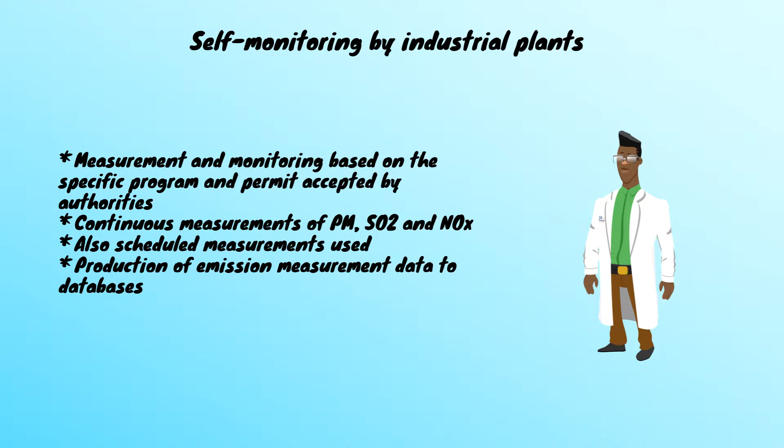The evaluation and control of emission reports takes place by regional environmental authorities. Eventually, additional information may be asked for, or even environmental inspectors may pay visits.

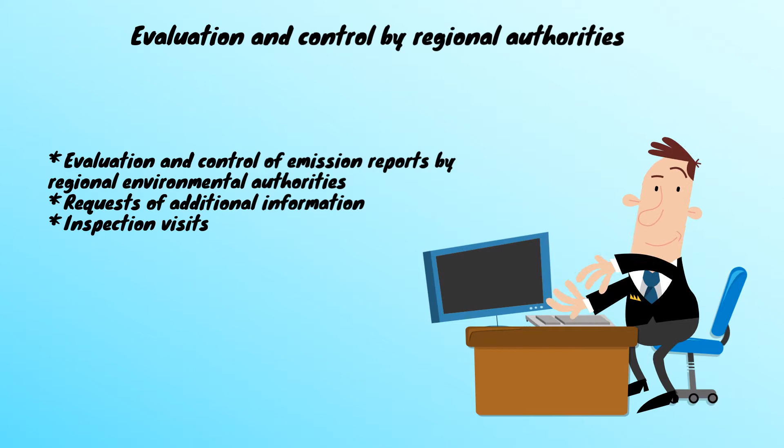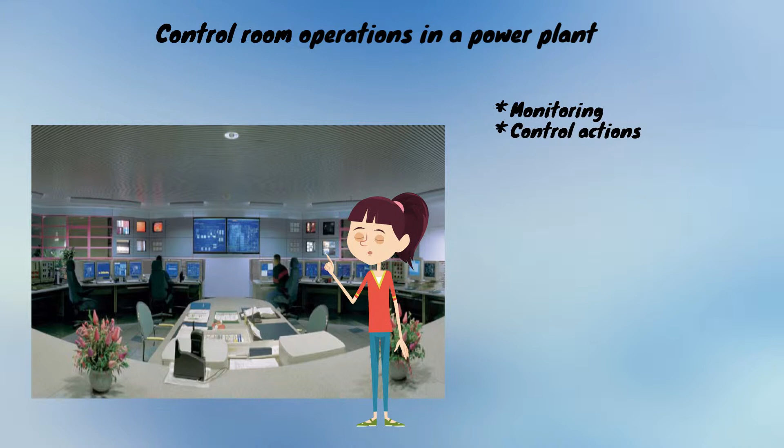Let's look at working in a central control room of a power plant. The operators monitor production using computer and video camera displays. When needed, they make some control actions, start machines, for example. You remember that from combusting power plants, we get some nitrogen oxides, sulfur dioxide, particulate matter, heavy metals, and persistent organic pollutants.

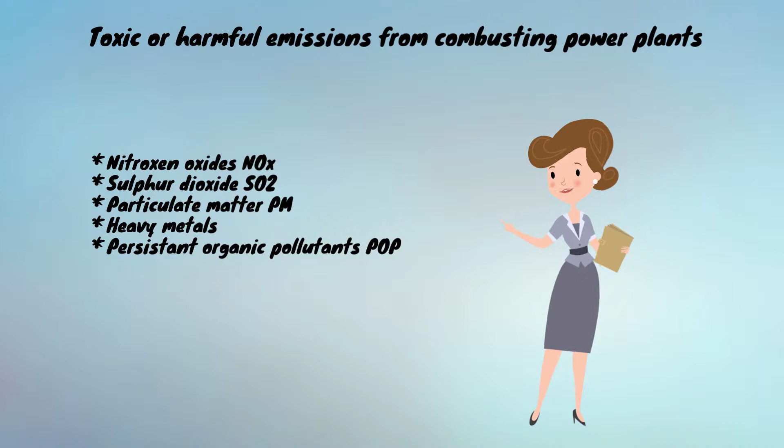This is how it looks in a district heating power plant. Different kinds of fuels are combusted in the furnace. Flue gases with some toxic emissions are coming out. There are filtering and cleaning arrangements in the flue gas channel.

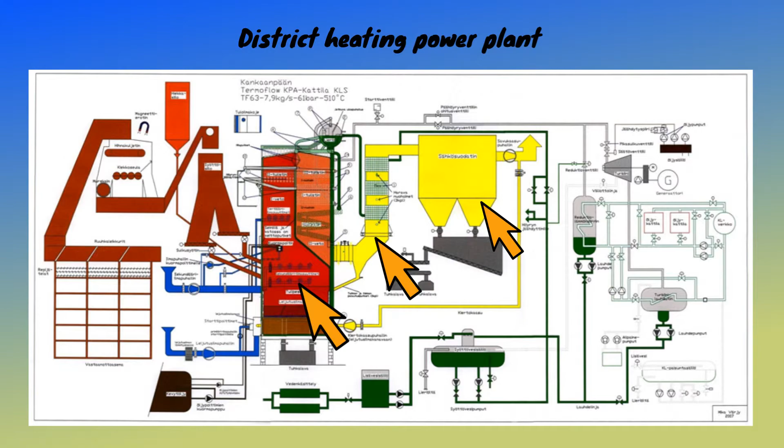Continuous emission measurement systems should be used in centralized power production. Emissions are measured in the stack and analyzed by the measurement system. The measurement values are automatically transferred to the process control system for monitoring.

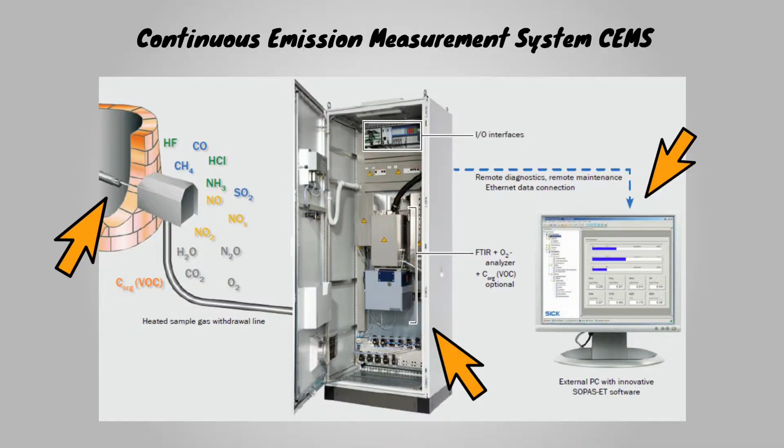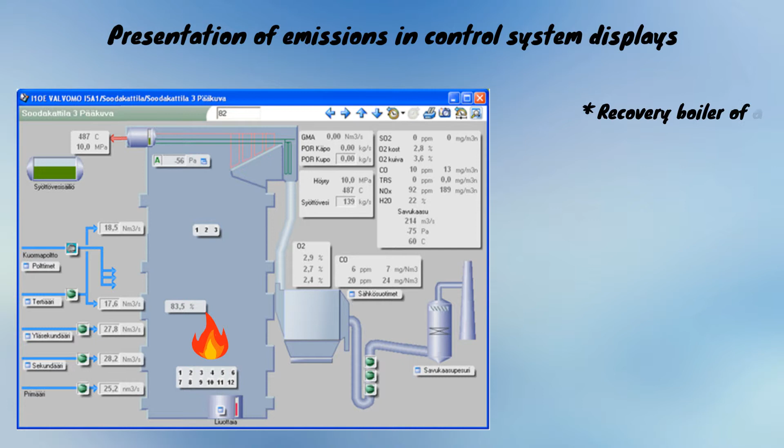This case comes from a pulp mill. Cooking chemicals are combusted for energy production and chemical recovery. Current emission values are presented in the display of the process control system and monitored by power plant operators.

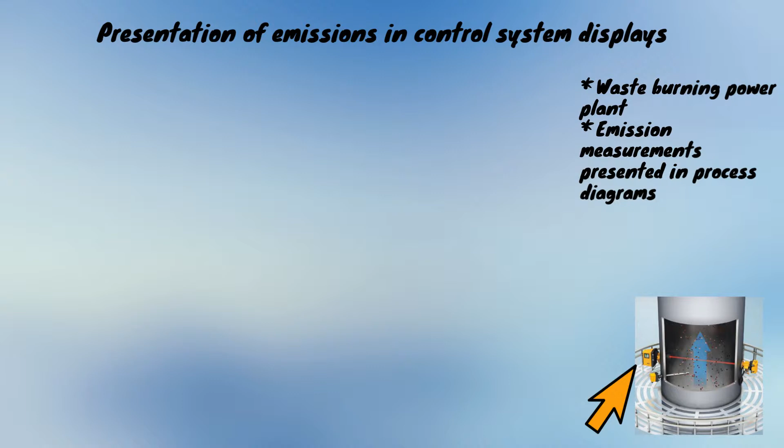Another case comes from a waste-burning power plant. Important emission values are measured online in the stack and presented in a process diagram display for operators. Here you see the current emission values. Continuous emission measurement systems are calibrated against reference standards according to norms, regulations and company policies.

Ministry of the Environment sets goals. Centers for Economic Development, Transport and the Environment promote air protection. Regional state administrative agencies handle permits and municipalities control locally. SYKE provides EU with measurement data.

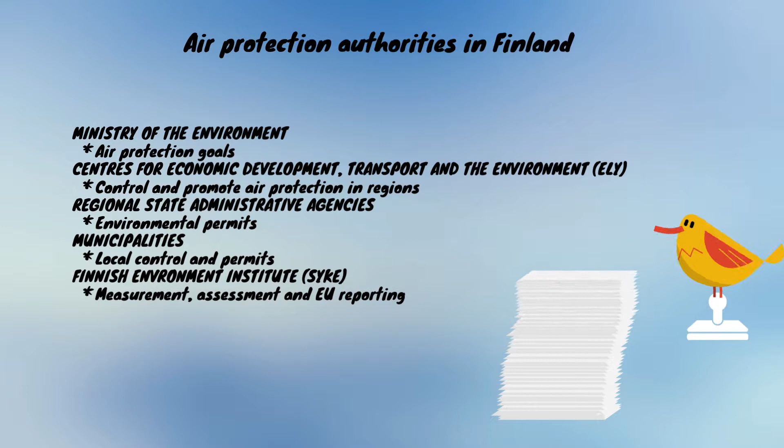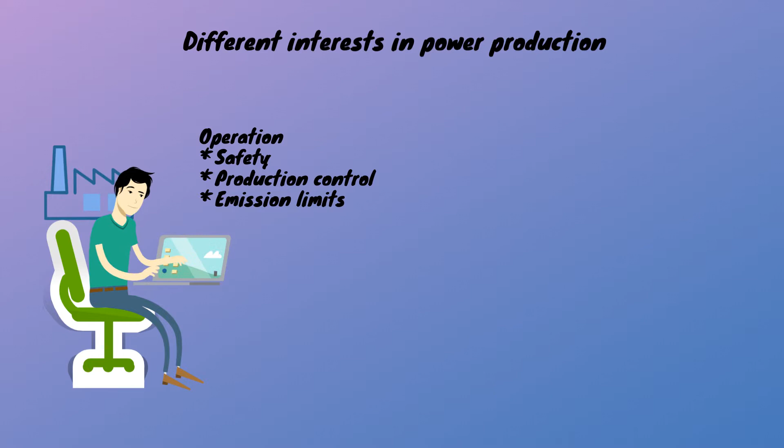Next, we discuss how to control and reduce emissions coming from power production. There are different interests in power production. In operations, the focus is on safety, production control and staying within emission limits. In businesses, the profitability with its fuel prices and emission trade plays an important role.

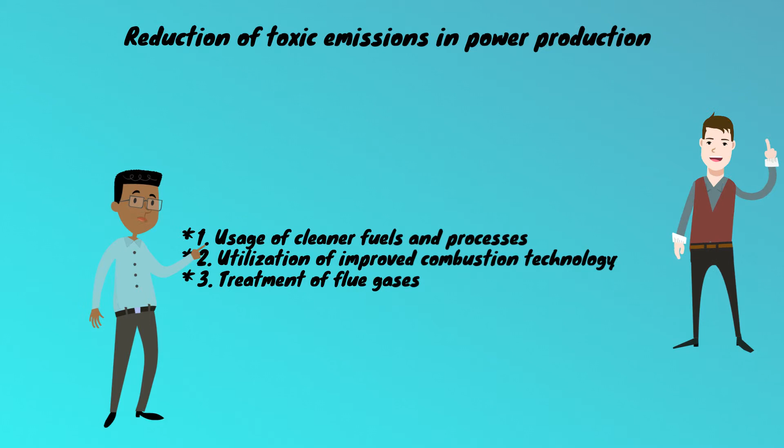Principally, there are three different ways how to reduce toxic emissions from energy production. Firstly, we may use cleaner fuels and processes. Secondly, we may utilize improved combustion technology, and thirdly, we should treat flue gases. We always get carbon dioxide when we are burning organic matters.

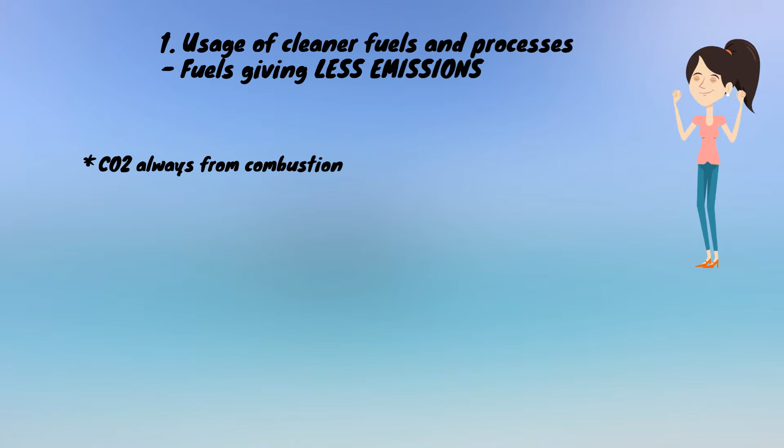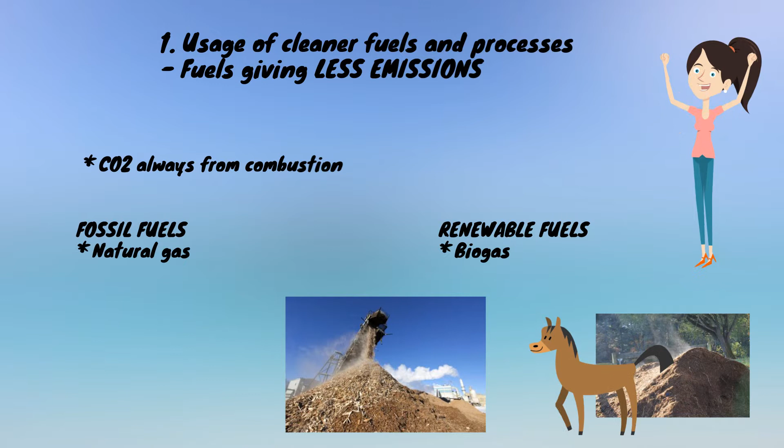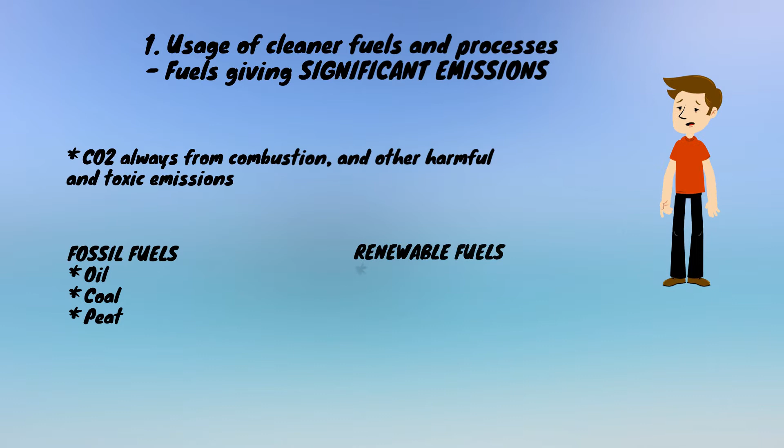Natural gas and biogases out of manure or waste, for example, don't make a lot of harmful emissions when they are combusted. We get a lot of emissions when we burn fossil fuels such as oil, coal and peat. Also some renewable fuels like biomass, black liquor of pulp mills and waste make significant emissions when combusted.

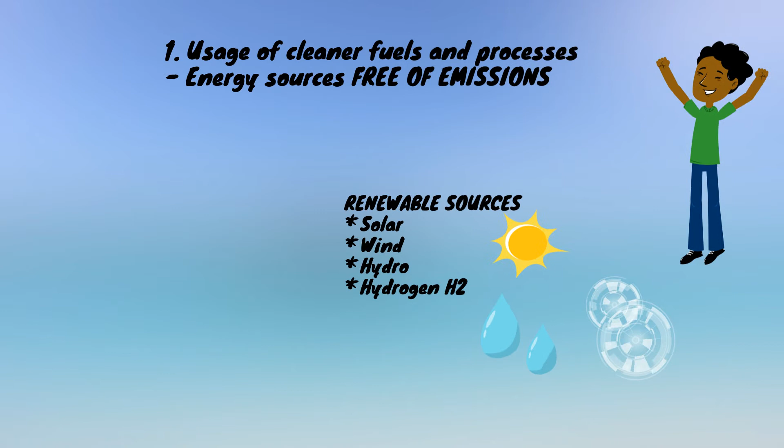Some energy production methods are free of emissions. This is the case with solar, wind and hydropower and with the usage of hydrogen. The use of nuclear reactions and geothermal heat does not make emissions, but there are problems with nuclear waste.

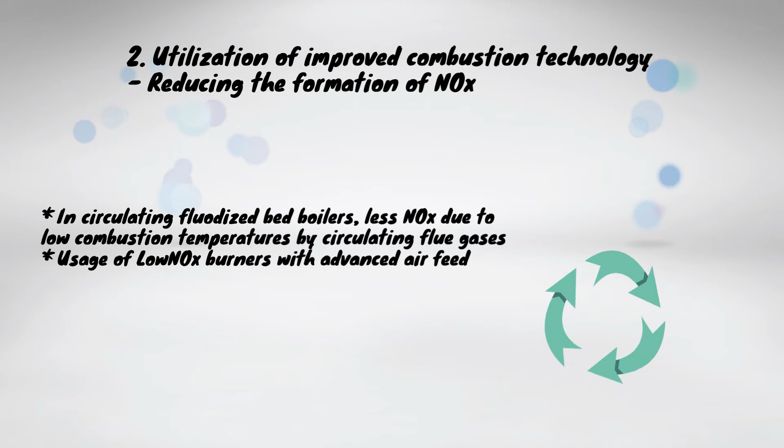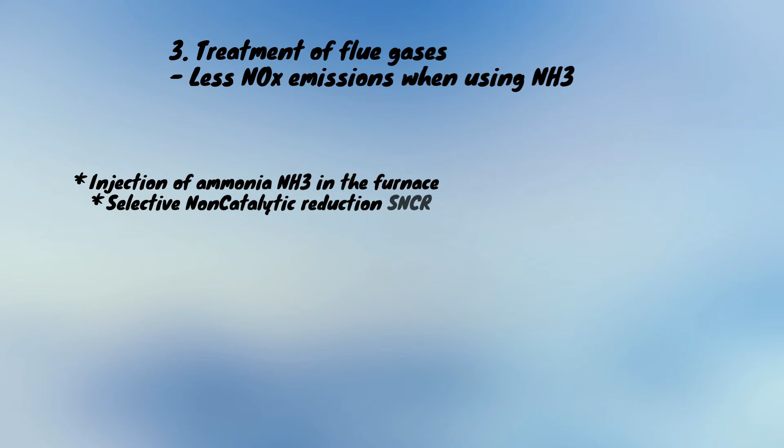In circulating fluidized bed boilers, the formation of nitrogen oxides can be reduced using low burning temperatures and circulating flue gases. Another NOx reduction method utilizes low NOx burners with advanced combustion air feed. Nitrogen oxides can be reduced using ammonia. The injection of ammonia in the furnace results in a reduction of 30 to 50%, while the injection of ammonia or urea in flue gases gives 80 to 90% reduction.

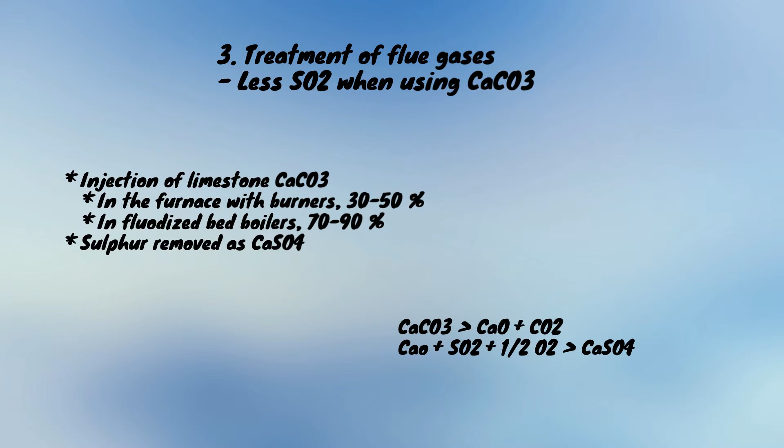Sulfur dioxide emissions can be reduced if limestone is added in the combustion. This calcium carbonate makes in the furnace calcium sulfate, which can be removed together with particulate matter. Electrostatic precipitators are located in the flue gas channel and they aim at catching particulate matter. In this electric filter arrangement, negatively charged harmful particles stick to plates and are removed by shaking.

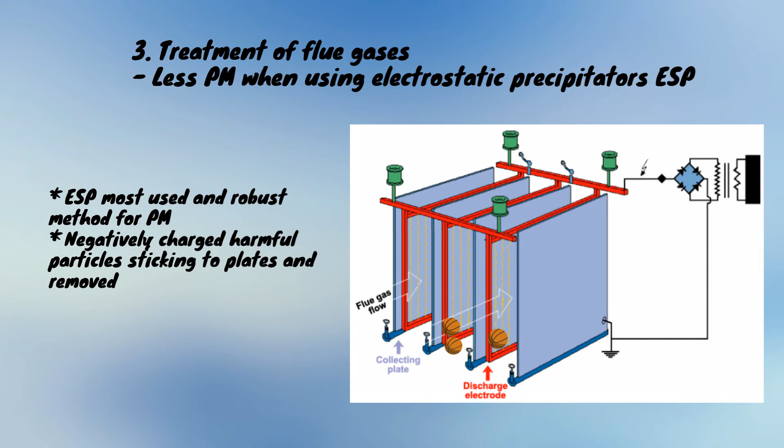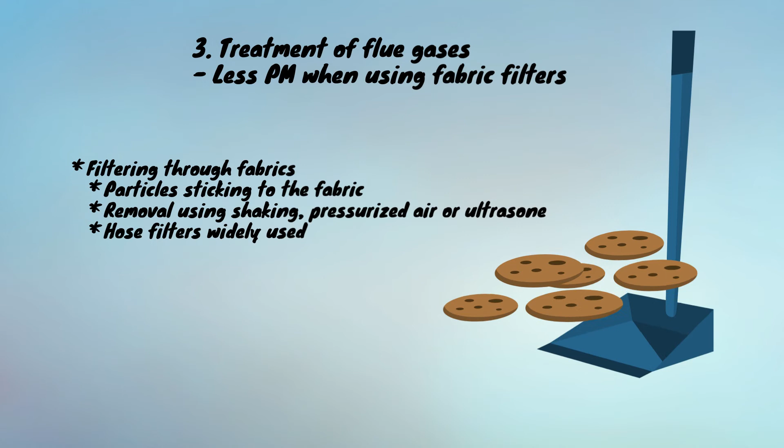Particulate matter can also be reduced using dynamic separators. In mechanical cyclones, flue gas is taken into swirls while particles are sticking to the walls of the cyclone and removed. Particulate matter can be removed using fabric filters. The flue gas flow is taken through a fabric and particles stick to the fabric. Shaking, pressurized air or ultrasound may be used for the removal of particles.

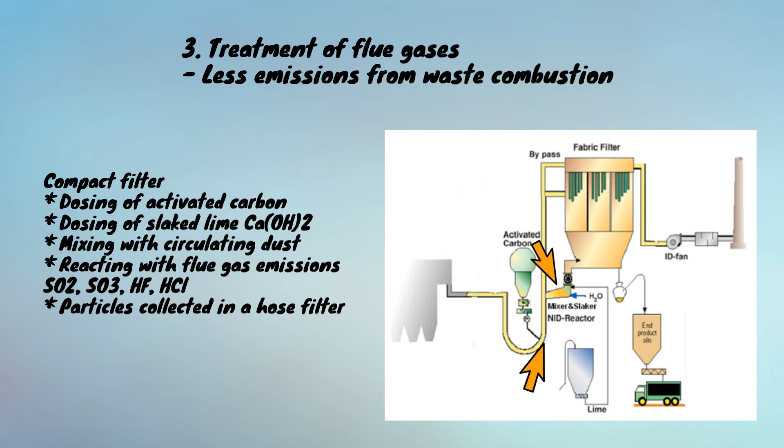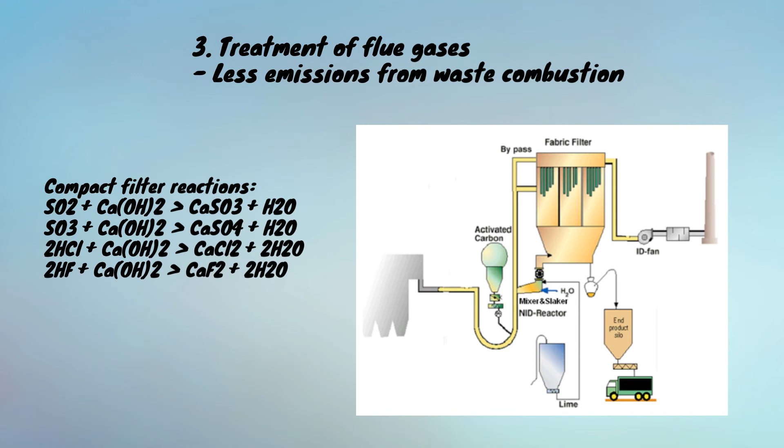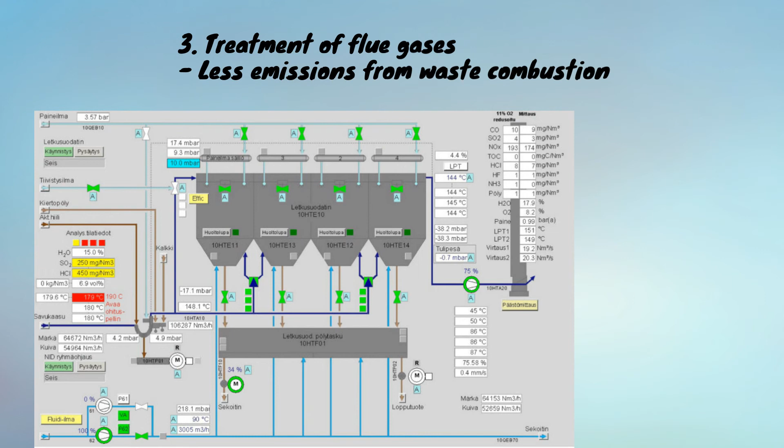This is a monitoring display of the compact filter in a waste-burning power plant. Here you see the status of the filter arrangement and the current emission values.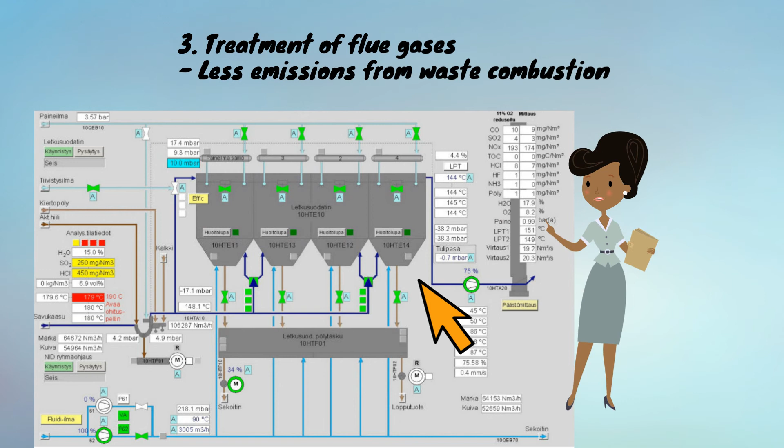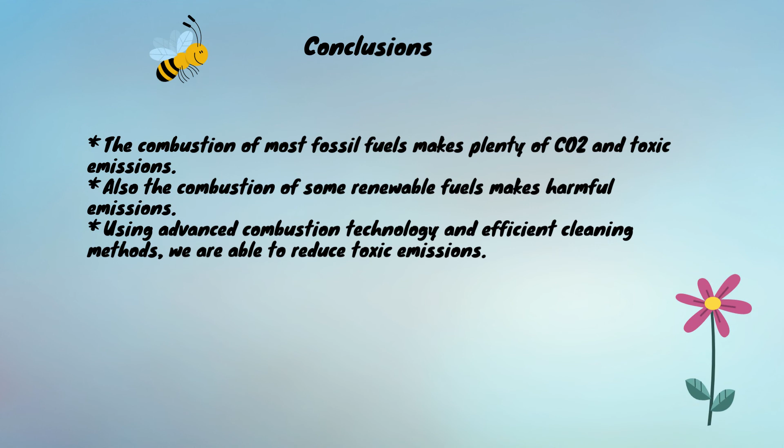The combustion of most fossil fuels makes plenty of carbon dioxide. Also, the combustion of some renewable fuels makes harmful emissions. Using advanced combustion technology and efficient cleaning methods, we are able to reduce emissions.